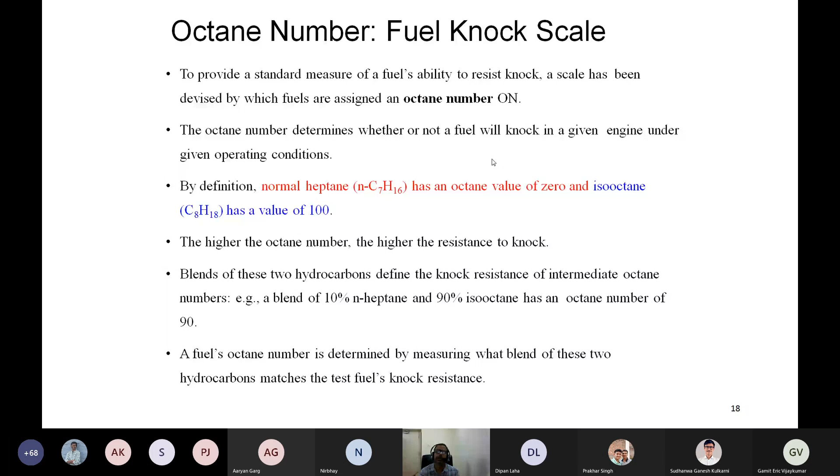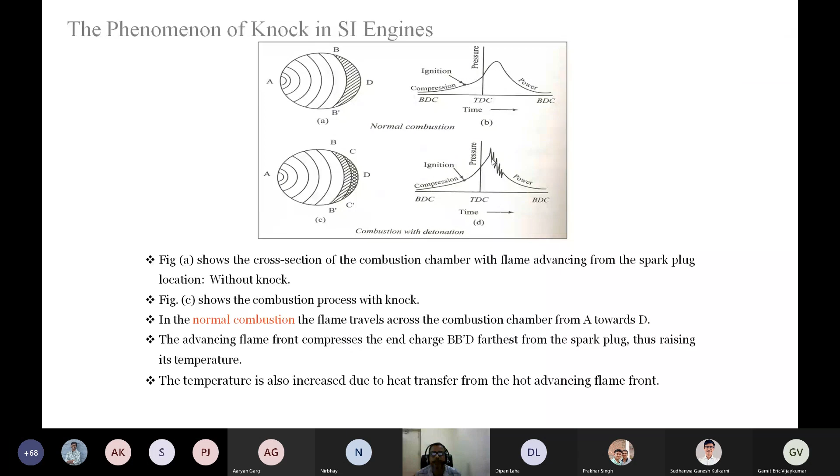So I'm sure you may have questions related to knocking and all its parameters. Now it's open for questions. Please ask if you have any. Yes, any question?

So the pressure pulsation in the knocking phenomenon is essentially caused by the collision of the two flame fronts. Yes.

In general, some kind of sound also comes out, but when the engine is running, there are a lot of mechanical vibrations. So if the knock intensity is mild, it's a bit difficult to identify whether knocking is taking place inside the combustion chamber just by hearing the sound. So the best way to analyze whether knocking is taking place is by recording the p-theta diagram.

And then you also have to be very careful that whatever noise or zigzag you are getting in the pressure trace, it is not signal noise or electrical noise, but it is because of the collision of the two pressure waves. That has to be on the pressure trace, whatever you are getting, then you have to do it.

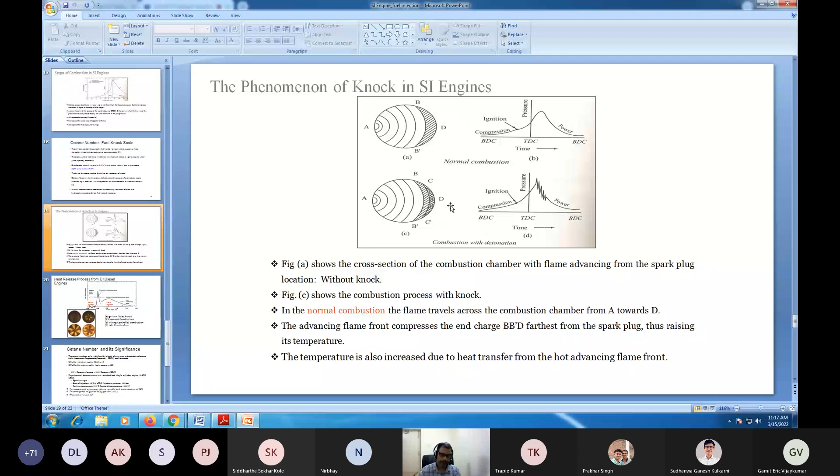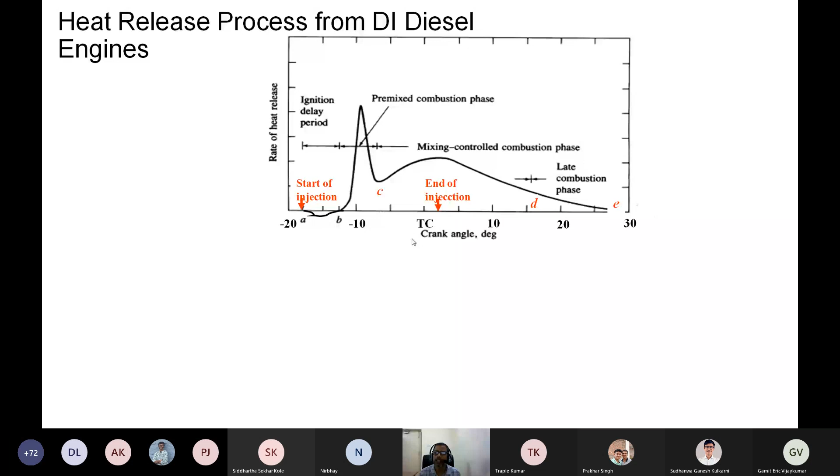Similarly, the late combustion phase is not going to contribute in terms of power output, but it will be very important from the emissions point of view. So just by analyzing the heat release curve of a typical diesel engine, the whole combustion of the diesel engine is divided into 4 different sections: ignition delay, pre-mixed combustion phase, mixing controlled phase, and the late combustion phase. These are the parts.

So now the question is why it is. First of all, we need to discuss why the heat release is negative. It is because here the fuel is absorbing heat from the combustion chamber, and that's why it is showing here as a negative value. Once it overcomes the ignition delay period, then fuel is releasing heat, and then the rate of heat release is showing a positive value.

Now, the second thing is: why in the pre-mixed combustion phase is the rate of the heat release so steep and high? Why is it happening? The thing is, during the ignition delay period, fuel is coming into the combustion chamber, but combustion is not taking place. So all the fuel that is coming during the ignition delay period will accumulate inside the combustion chamber. It will go through all the physical processes and overcome the ignition delay period.

And then, depending upon the thermodynamic condition, there is a possibility that all the fuel that has been accumulated during the ignition delay period, or part of the fuel that has been injected during the ignition delay period, will combust simultaneously, and the rate of the heat release will be very steep and very high instantaneously. Once all the fuel burns out, what will happen? The heat release will decrease, but will not come down further because the fuel injection is still going on, and since the combustion has started, the pressure and temperature inside the combustion chamber is very high.

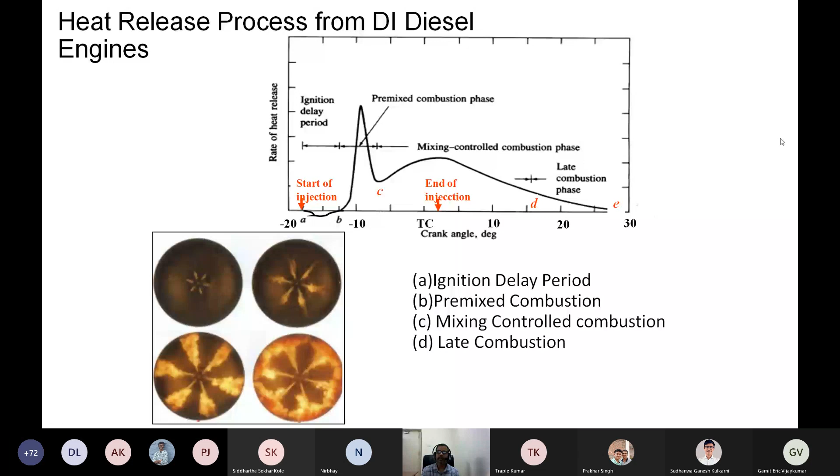The dip point is difficult to point out, but in the later part we draw the point, and that is called the end of the mixing control phase. After that, the late combustion phase is going on. Whatever hydrocarbons have escaped from the pre-mixed and the mixing control phase may or may not find an opportunity to burn at a very slow rate, and that is termed the late combustion phase. That is a typical heat release curve of the diesel engine. Here we have different phases of combustion: ignition delay period, pre-mixed combustion, mixing control phase, and late combustion phase.

Now imagine that you are using a fuel that has a longer ignition delay period. Then during that ignition delay period, more fuel will be accumulated. And once the combustion starts, the peak of the premixed combustion phase will be very high. There are so many flames, because in the diesel engine there is not one spark plug; there are so many sites of initiation of the combustion. So there is a possibility that the rate of pressure rise will be very high.

And since there are different initiations of combustion, different pressures will be created, and because of the very high rate of combustion, the knocking probability will be higher in the beginning of the combustion if the ignition delay period is very long. And therefore knocking in the diesel engine is likely to occur in the beginning of the combustion because of the large amount of fuel accumulated in the ignition delay period.

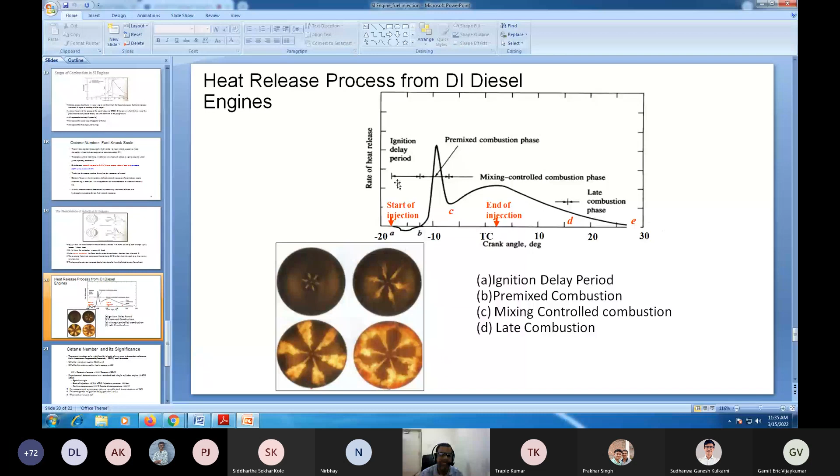So in this discussion, what we can conclude, at least one very important point, is that in a diesel engine we should use a fuel that has a lower ignition delay period. So for defining this characteristic of the fuel, there is one term that is called cetane number.

Cetane number defines the ability of the fuel to combust, how fast it combusts. If the cetane number of the fuel is higher, then it will combust very easily. If the cetane number is lower, then it will have a longer ignition delay period. Okay, I'm not going further right now in the discussion of this part.

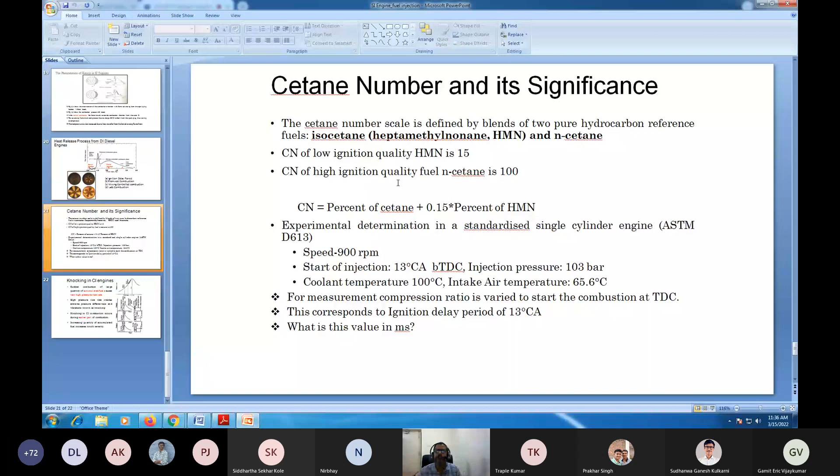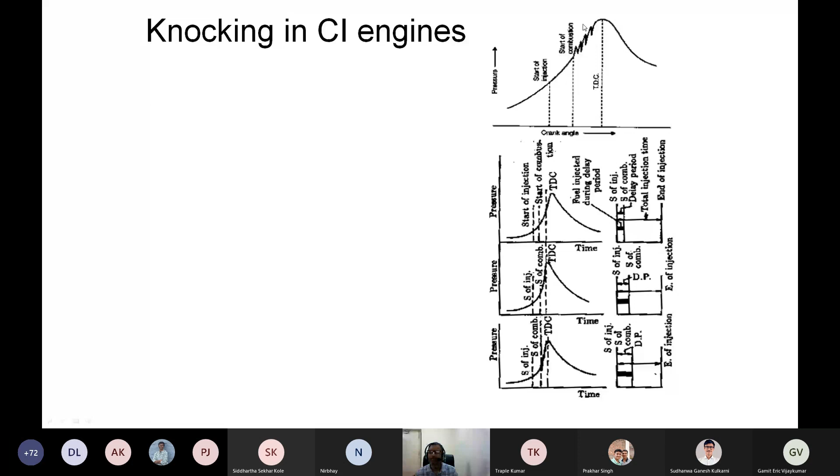Here we have the start of injection and the start of combustion, and since the ignition delay period is so high, once combustion starts, all or most of the fuel may ignite and it will knock, giving a zigzag curve. So this is knocking in the diesel engine. If you remember the SI engine knock curve, the zigzag appears after top dead center towards the end of combustion. But in the diesel engine, we get it at the beginning of combustion. And that is the knocking phenomenon.

And this knocking phenomena can be reduced if the environment inside the combustion chamber or the fuel properties are such that it has a lower ignition delay period, and then what will happen? Then it is possible to initiate the combustion as soon as it comes into the combustion chamber.

Further, with the advancement of our new CRDI system that can penetrate the combustion chamber to a larger extent, and it has very small droplets, it will be easy to evaporate and mix with the fuel air mixture. It will reduce the ignition delay period and reduce the possibility of knocking in the diesel engine also, compared to your mechanical fuel injection system. So that's the way the knocking can take place in the diesel engine.

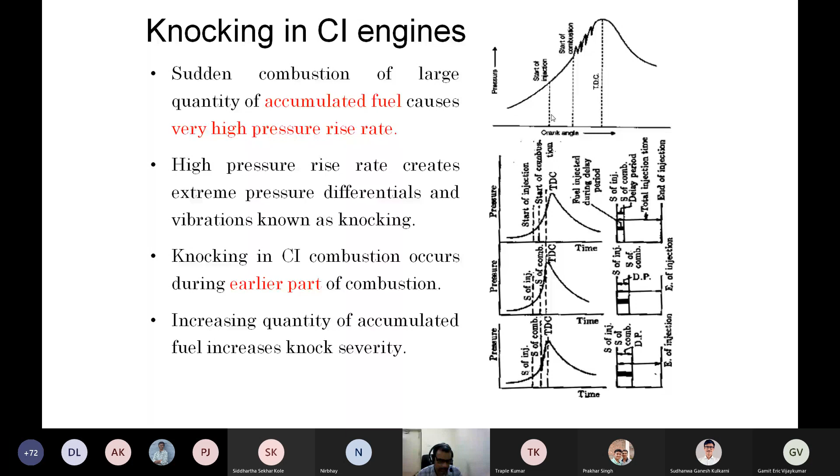Okay, so now it is again open for questions on the diesel engine part. Please ask the question. Any question?

I would suggest all of you please read a few pages of the J.B. Heywood book related to knocking. With our discussions in the class, it will be easy for you to understand and get some in-depth knowledge also. If something is not clear, please discuss in the next class or any other classes. But here we still have time. You may ask if you have some doubt, because today's content is over. From the next class onwards we will start emissions.